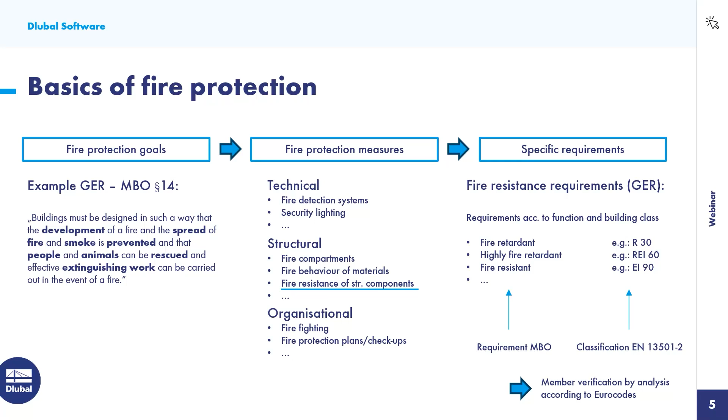So let's take a look at how fire design is regulated in the Eurocodes. I would like to start with the combinatorics.

According to Eurocode 0 or EN 1990, the case of fire is to be regarded as an exceptional design situation. Accordingly, the mechanical actions are combined without partial safety factor. The use of psi 2.1 is recommended in the main document for the leading variable action, but there are many deviations in national annexes. In Germany, for example, psi 1.1 is prescribed for leading wind actions.

It is obvious that the combination rule results in significantly lower actions when compared with the permanent and transient design situation that we commonly use for the design under normal temperature. As a safe side assumption, the loads from the code design multiplied by a reduction coefficient can also be used. However, this is generally uneconomical and therefore not recommended, especially when we use a design software that can do the correct combinations anyway, like RFEM.

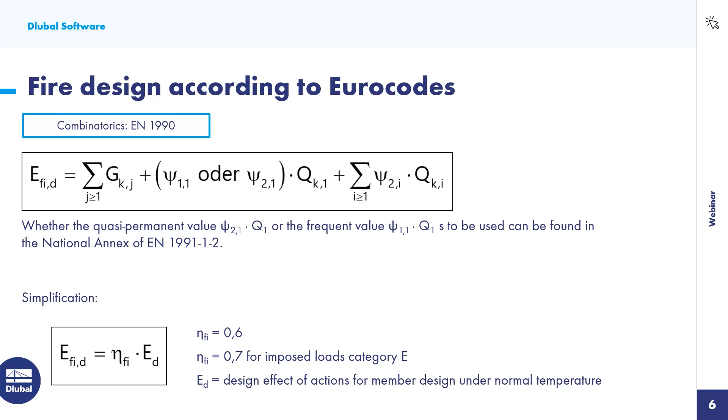In addition to the mechanical actions, the thermal action in accordance with EN 1991 Part 1.2 must also be taken into account. In the event of a fire, there's a considerable increase in the ambient temperature, and sooner or later, the structural elements exposed to the fire will heat up as well. This has a dramatic effect on the material properties of steel components on one hand. On the other hand, the temperature increase can lead to indirect stresses in case thermal expansion is restrained.

Real fire scenarios develop in 4 stages. We have the incipient stage, the growth stage, the fully developed fire phase, and the decay phase. The transition to the full fire phase is called flashover and is associated with a rapid rise in temperature.

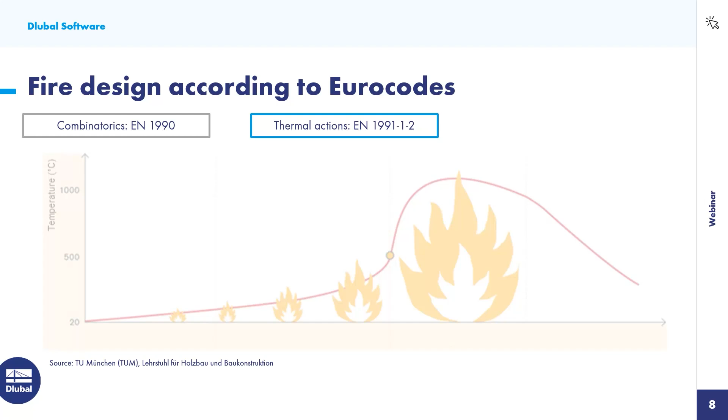For engineers, it is very challenging to accurately predict the development of a natural fire scenario. Instead of trying, so-called nominal fire curves have been established almost 100 years ago to describe the temperature developed in a compartment over the duration of the fire in a simplified manner.

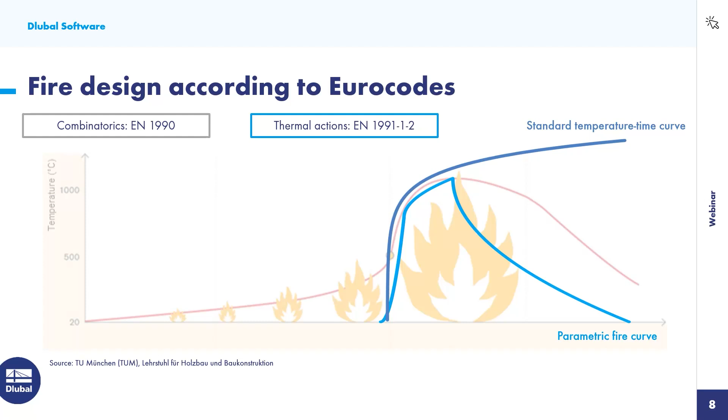The standard temperature curve is used for fires inside buildings. This temperature curve is also used for standardized fire tests on structural elements, which means that the behavior of typical elements under this nominal fire exposure is quite well documented and verified. Alternatively, the Eurocode also allows the use of more sophisticated approaches to predict the temperature development, such as parametric fire curves, zone models, or results from CFD analysis.

The actual design of structural elements is regulated in the respective material-specific Eurocode, such as the Eurocode 3 Part 1.2 for steel construction. In principle, all ECs or Eurocodes distinguish between 3 alternative methods with increasing complexity and accuracy.

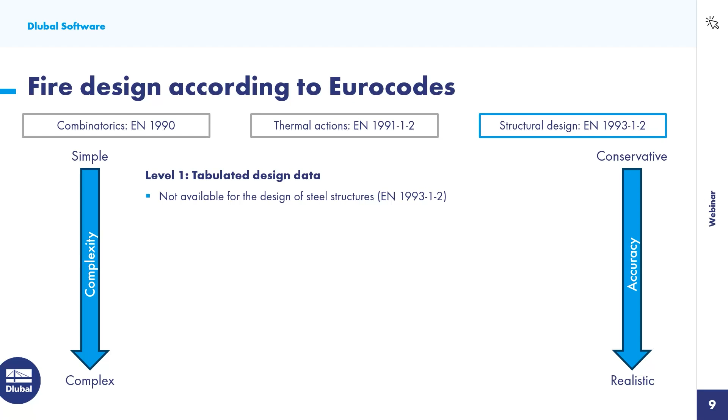The simplest design approach is design by tabulated data. This is oftentimes used for fire design of concrete elements, where it is sufficient to choose the suitable dimensions, for example, wall thickness, for a specific fire class. This approach is unfortunately not available for steel structures.

In the second level, we find the so-called simplified design methods. Here, the thermal actions are prescribed by nominal fire conditions, such as the standard temperature curve for fires inside of buildings. For such conditions, Eurocode 3 Part 1.2 gives clear rules for the design of steel members. This verification can either be done based on the resistance or based on the critical temperature.

The most accurate but also complex analyses are possible under the advanced design methods. The thermal actions are usually derived by more sophisticated methods here, such as parametric fire curves, zone models, or CFD. This enables a more economic design most of the times.

The design rules are very openly formulated. Any suitable thermal and mechanical analysis model can be employed. However, the validity of the chosen approach must be proven on a case-specific basis and requires a high level of expertise. In RFEM 6 and also RSTAB 9, the resistance-based simplified design method is implemented.

A system calculation under elevated temperatures is not required in this case. The design concept is very similar to the design under normal temperatures, but under reduced load as we combine actions in the exceptional design situation. The thermal action is only taken into account on the resistance side and induces a reduction of design-relevant material properties. I would like to explain this point more detailed in the next slides.

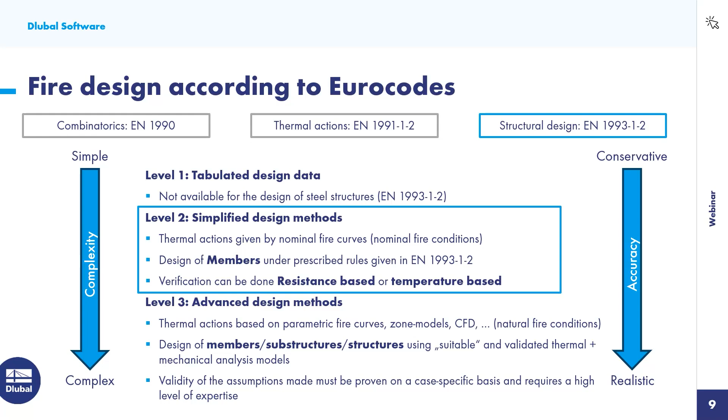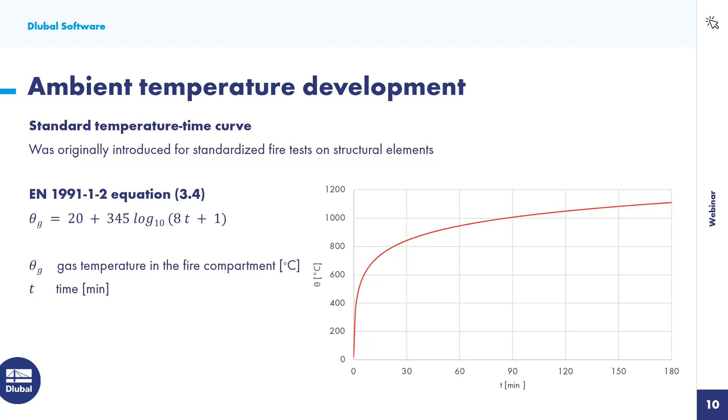As explained on the previous slide, the simplified design method is linked to the application of the standard temperature curve. This means the development of the ambient temperature during a fire is approximated in a simplified manner according to the logarithmic function shown here. The standard temperature curve idealizes the full fire phase and neglects the growth and decay phase of the fire.

So the development of the ambient temperature is specified by the standard temperature curve. However, for design purposes, we are interested in the actual temperature of the structural member. According to EN 1991, or Eurocode 1, Part 1.2, two different components must be taken into account when analyzing the transport of heat from the surrounding hot air into the heated component.

The heat flux from convection, so the exchange of heat from the hot ambient air and the cold component surface in the boundary layer, and the heat flux from radiation or thermal radiation.

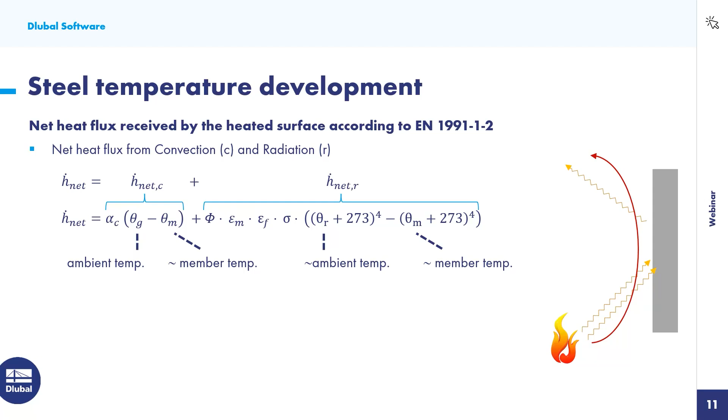Additionally, Eurocode 3 Part 1.2 contains a formula for calculating the temperature development of unprotected steel members. In addition to other parameters, this formula includes the aforementioned net heat flux. The formula assumes uniform heating of the cross-section, and the input variables shown here change with the component temperature. It can only be solved iteratively in small time steps described by delta t.

I know there's a lot to explain, but I'd like to leave the formula as it is right now. We'll come back to the various parameters in detail later, as they are important influencing variables for fire design and any fire protection measures. For now, we take note that we can describe the relationship between ambient temperature and component temperature in the event of a fire. But how does the member temperature actually affect the design?

According to Eurocode 3 Part 1.2, design-relevant material parameters such as the yield strength and stiffness must be reduced depending on the material temperature, while the yield stress only has to be reduced at temperatures above 400 degrees Celsius, but then quite rapidly, as you can see here.

The stiffness already decreases at significantly lower component temperatures. At around 600 degrees Celsius, the reduction of the yield stress already accounts for roughly 50%. At 800 degrees Celsius, it is almost 90%, so there's only very limited resistance left. These reduction factors are then considered in the member design equations under fire conditions, which are otherwise very similar to the verifications we use for design at room temperature according to Eurocode 3 Part 1.1.

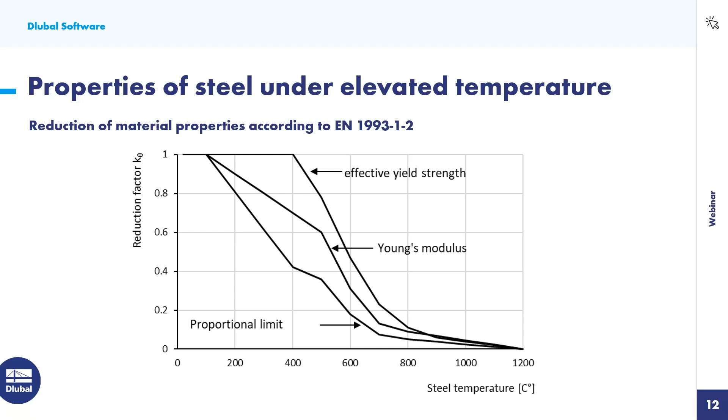Okay, so I have already prepared this simple model beforehand. It's just a simple beam with an intermediate support in lateral direction in the middle. It's an HEA 300 section, 10 meters long. I think the steel is S235. Yes. This member is already loaded by 3 load cases, so self-weight of the beam itself.

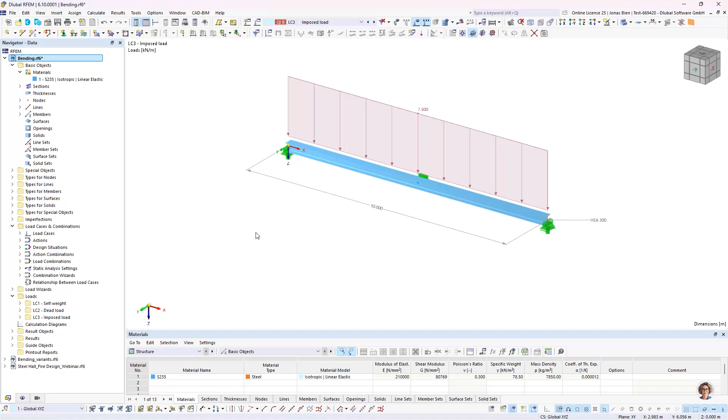Then we have dead load, an additional 5 kilonewton per meter, and load case 3 is imposed load category B with 7.5 kilonewton per meter. I've also defined one design situation for the code design of this member, so the usual combination of permanent and transient, as you can see here, and this results then in automatically generated load combinations.

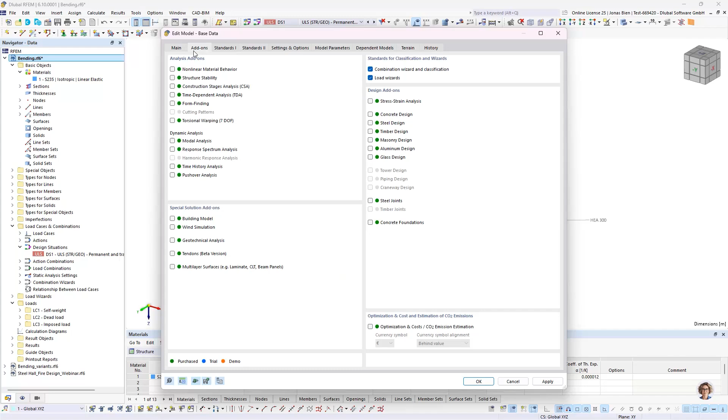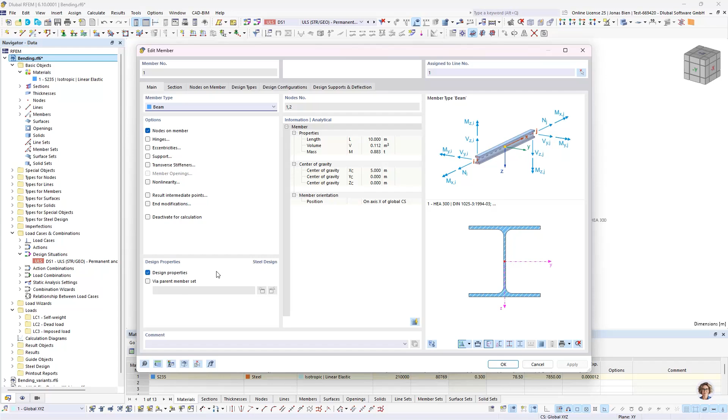I want to start with the code design. So I switch on the steel design add-on, go to standards, and for now I will just use the main documents of the Eurocodes and use the common rules. As we are used to, the design add-on has already recognized that we have this member that can be designed with our steel design add-on. So that's fine. And besides the section checks, I also want to do the check for lateral torsional buckling according to the equivalent member method.

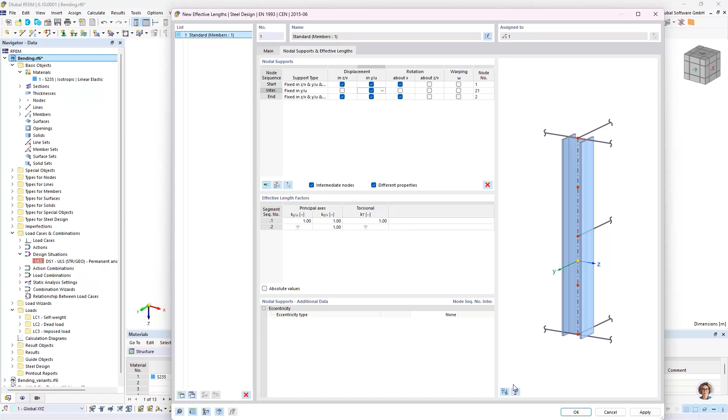So I will also define an effective length, and I want to leverage the intermediate node. So I will just enter or assign a lateral support here at the middle, as we have modeled it in the global model as well.

Okay, so let's do this. And by the way, this assignment of the buckling length is valid for the code design and also for the later fire design that we are doing.

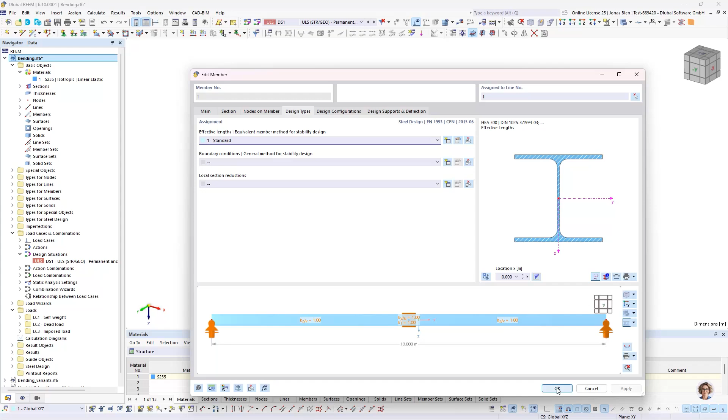Okay, but for now, let's start with the code design, the usual thing that we know. I will just run the simulation now, this very simple case, and we will check the utilizations that we get under normal temperature. Okay, so as we are used to, we get section checks for shear and bending. There's also, I think, shear buckling. And since we also activated the buckling length, we also get the stability check for lateral torsional buckling. We can see that the maximum utilization is around 83%. So this is completely fine.

Everything's good so far. So now let's see how this changes when we investigate the fire scenario. Let us do all the adjustments that we need in order to activate this. First of all, we need a design situation that is appropriate for our fire case. So I will add a second design situation for the accidental load case, using psi 2,1 as it is prescribed in the main documents of the Eurocode.

We can again check the combination rule, and this is totally fine for us and looks like the rule that I showed you before in the slides. Okay, so I get two additional load combinations now for the fire situation.

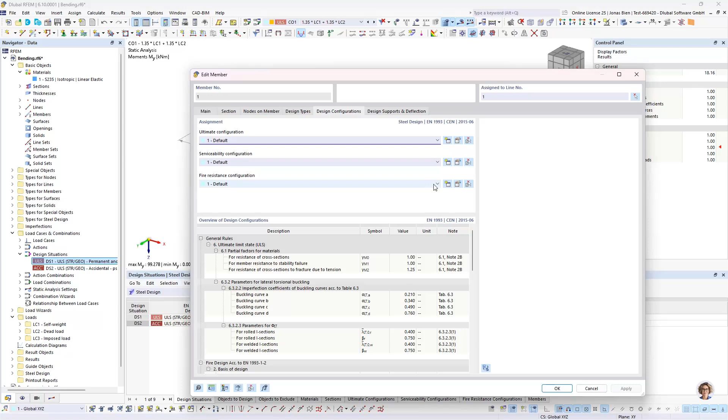In here we have to first define what the resistance class of my member is going to be, so at what time I want to perform my fire design checks. In this case, I assume my member needs to survive for 30 minutes, so it has an R30 requirement. I will set 30 minutes as the required time for the fire resistance.

We can also see here under the temperature curve for determination that by default the standard temperature time curve is set, and this is the one we want to use for internal fires and the member design method. We could also give a manual temperature for the program to use for the fire design checks, but we want the steel temperature defined by the standard temperature time curve.

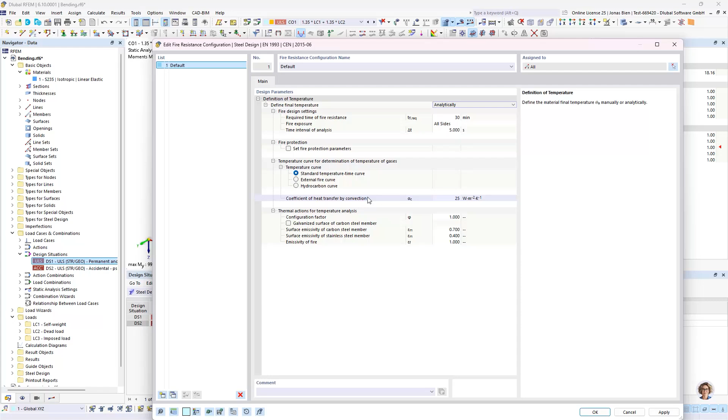And we want to do the check after 30 minutes. The remaining parameters I will not touch yet; we will come back to this later. So I will just assign this by clicking OK, and then run the steel design again.

So we have to solve now the two additional load combinations, and then the steel design runs again. First of all, I want to compare the forces that we now have to take for the design.

So if we check the maximum bending moments for design situation 1, the cold design case, we have a maximum bending moment of almost 240 kilonewton meters, while in the second design situation under accidental combination, we get more or less 100 kilonewton meters. So the load we need to take into consideration in the hot design is much smaller than in the cold design.

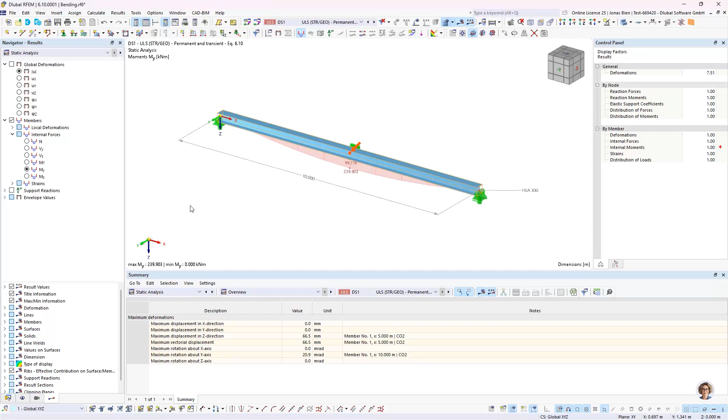However, as we could already see, we now have a big problem with our design verification checks. The maximum utilization is over 300%, so that's not good at all. Let's check why that is, and how it comes that the utilization is so much higher than in the cold design stage. Let's actually compare some design checks.

We could start with the bending check about the strong axis. We will start with the cold design, which we are very used to. So we have the 240 kilonewton meter design bending moment. We do the section classification and see we have a class 1 section, meaning we can use the plastic design resistance to calculate our utilization. In this case we have a utilization under 80%.

But how does this change in the fire design situation? Let's check the respective check under increased temperature. We see we have a smaller design bending moment as already shown before, and now we also have a different section class. That is interesting, and we can also check what is the reason for this.

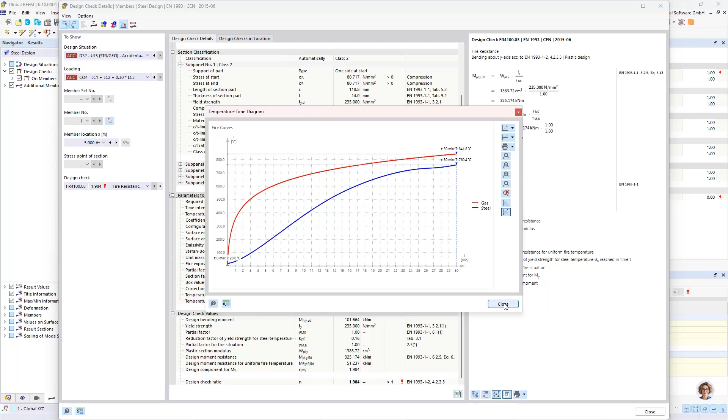There are also some other parameters here given for fire resistance. Up here we find all the settings assigned to this member by the fire design configuration, and then some additional parameters that I will focus on later. For now, we can see that for the cross-section checks, we have a drastic reduction of the resistance due to the increased temperature, which is very high in this case.

Maybe we can also check the stability design check, because that reveals some details too. First, we calculate the critical bending moment the same way as we do for the cold design. I think this 757 should be the same for the cold case as well.

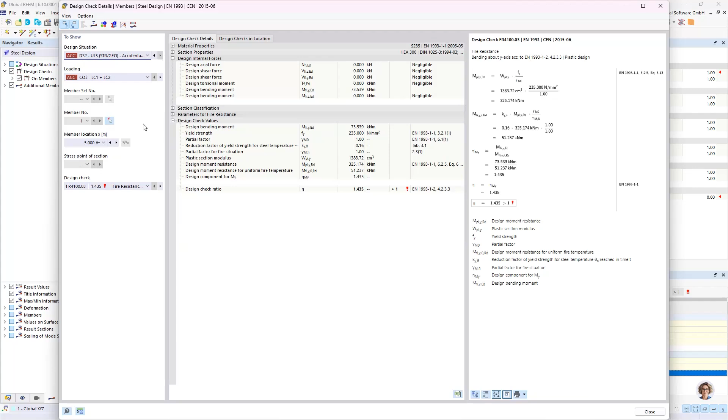When we check the stability design check, yes, it is one-to-one. But then in the fire situation, we have to again reduce it by taking into account a modified dimensionless slenderness. This slenderness is not only modified by the reduction factor for the yield stress, but also depends on the reduction factor of the stiffness, because stability design checks are very much dependent on the stiffness of the system. So any degradation on that side will also alter our verification check for instability.

Another important point is the derivation of our imperfection factor. While in the cold case this depends on the cross-section buckling curve, here it only depends on the material of the section. So there are slight adjustments, but otherwise the schema for the verification checks is very similar to the cold design case.

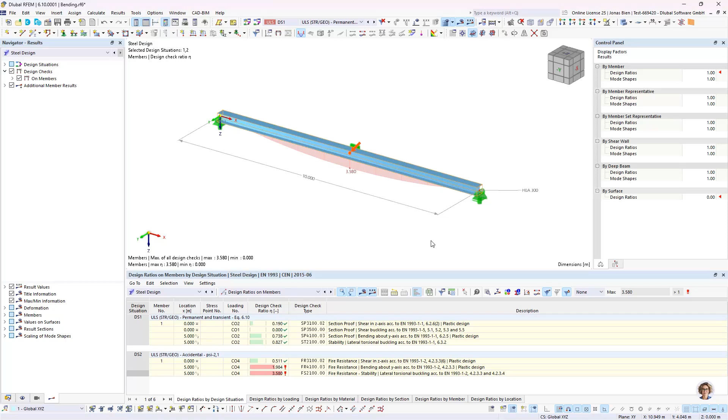I think we can agree that our first attempt to verify the fire resistance of this beam was not very successful. So what can we do to increase the fire resistance of our beam? Of course, we could lower the loads or increase the section size, but we've seen that the member heats up very quickly, leaving only minimal strength and stiffness after 30 minutes.

To discuss possible measures to delay the heating process, let's come back to the formulas describing heat transfer from the ambient temperature into the structural element. We've seen these before, and if we combine the two formulas, we get this quite long expression. Most of the parameters represent physical constants that we as structural engineers cannot influence much: the specific heat of steel, the density of steel, the coefficient of heat transfer, the configuration factor, the emissivity of fire, and the Stefan-Boltzmann constant. Those we shouldn't touch at all.

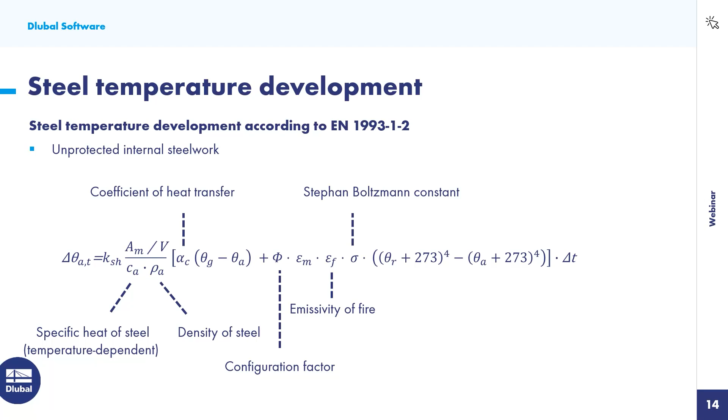However, let's take a closer look at the expression A_m over V. This ratio, also known as the profile factor, describes the ratio of the cross-section surface area to the volume per unit length, or in other words, the profile circumference to the profile area of the section. So the profile circumference for the HEA 300 here would be the dashed red line, and the cross-section area, or profile area, would be the yellow section.

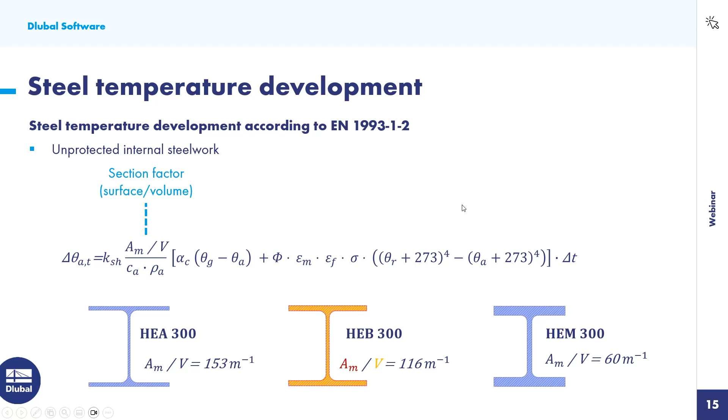If we compare the three cross-sections shown here - the HEA, a bit more slender than the HEB, and then the more compact HEM 300 - we can see that the circumference of the profile hardly changes as the cross-section parts become thicker, while the cross-section area increases significantly. This means more compact cross-sections have a lower profile factor, as demonstrated in this example calculation. As a consequence, since the profile factor is in the numerator of this heating equation, compact sections heat up more slowly. We will check this in a minute in the model again.

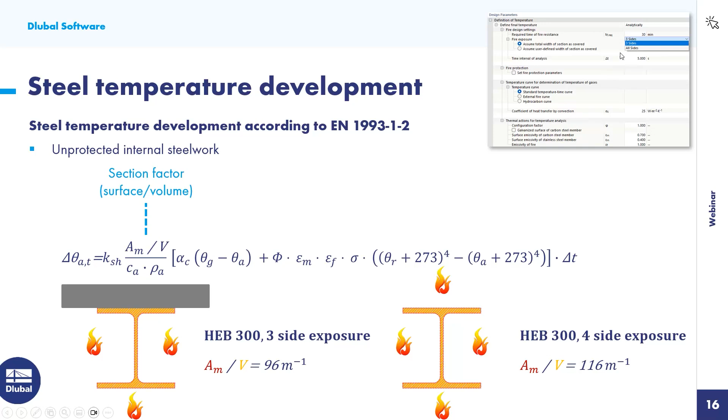Such a situation can also be considered in our program through the fire configuration settings. I will also show this later.

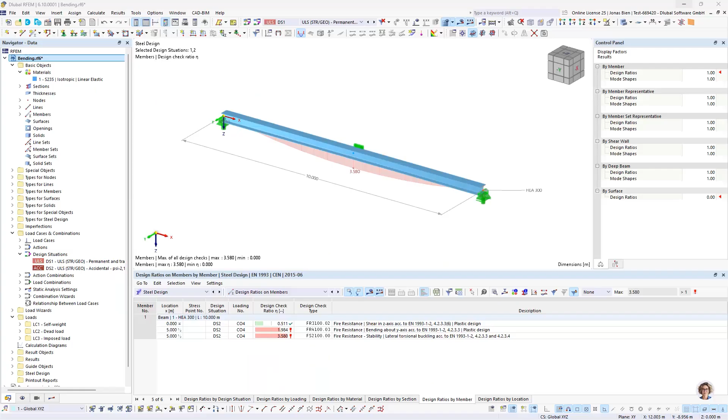Let's check if we can observe the described behavior also in our program by taking the appropriate settings. So let us switch to RFEM again. I have prepared a second model where I copied my simple beam HEA 300 that we discussed before and changed the section into an HEB 300 and HEM, as I've also shown you as an example on the slides. I applied the same loads and conducted the fire design checks here.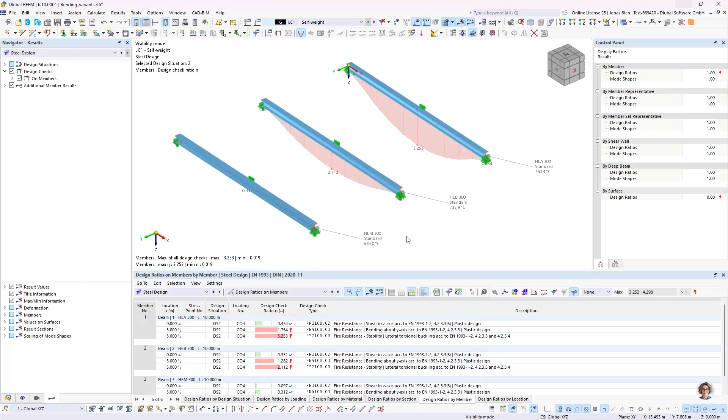It's of course no miracle that the utilization factor for the bigger profile, HEM 300, is lower. This is expected when we choose a more capable section. HEM has a higher bending resistance and also much lower slenderness, which comes into play when we look into the lateral torsional buckling design check.

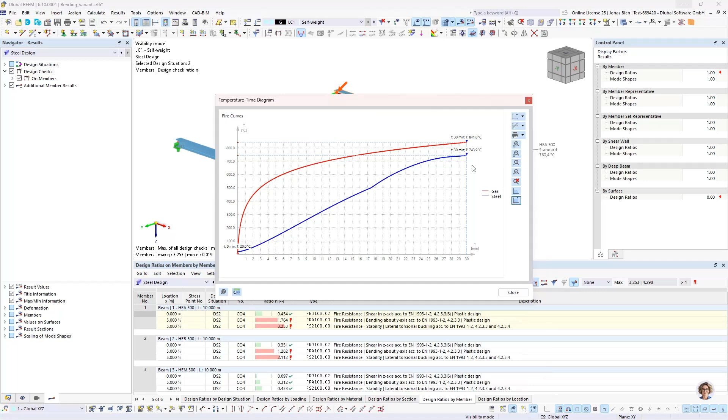But we don't want to focus on that, but on the member temperature and how it develops during the fire event. We have already checked the temperature development for our HEA 300, and we've seen that at the end, at 30 minutes, we have 743.9 degrees Celsius.

The HEB 300 is only a bit colder, 735.9 degrees. But when comparing this to the HEM, we see that by taking this much more compact section, we get a lot less heating after 30 minutes. The HEM only has a temperature of 628 degrees Celsius after 30 minutes, although unprotected.

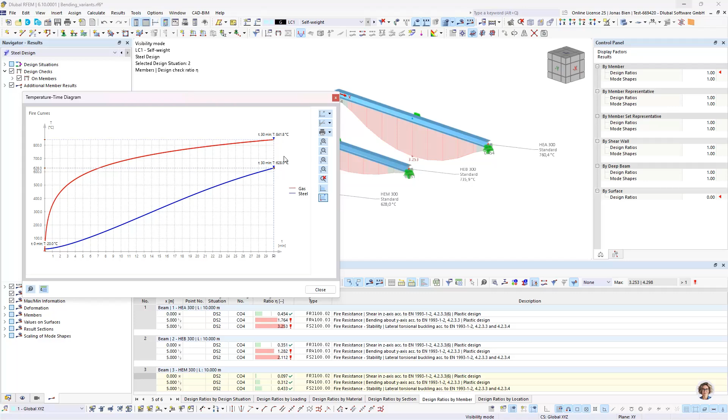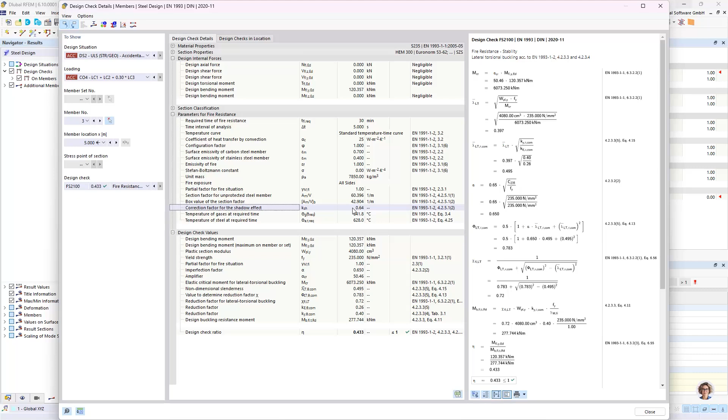We said this is because of the profile factor, and we can check this profile or section factor here in the design details for all these members. We can see that as we move on to member number 3, which is the HEM, we have a very low section factor, resulting in lower temperatures. We also see the correction factor for the shadow effect that we talked about, also given in the design details.

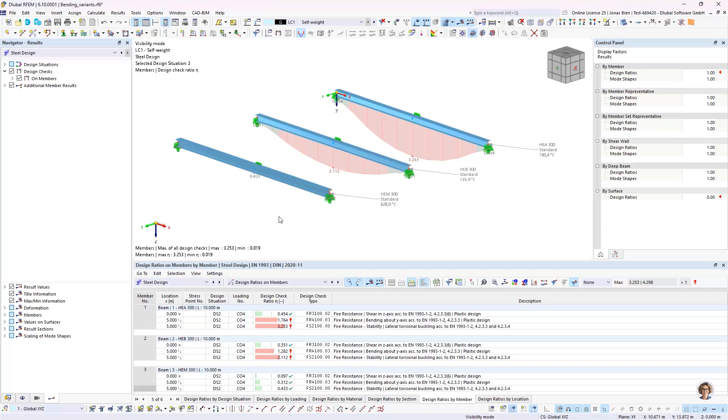We also talked about a second option to reduce or manipulate the profile or section factor, and this would be by adding or avoiding all-side exposure to the flames, for example, by a concrete slab. I have also added another example where I modeled an HEB 300 and modified the fire resistance configuration so that I only apply a 3-sided fire exposure.

As a result, we can see that compared to the standard fire case with 4-side exposure, it heats up around 30 degrees Celsius less after 30 minutes, which isn't a huge deal, but it's something.

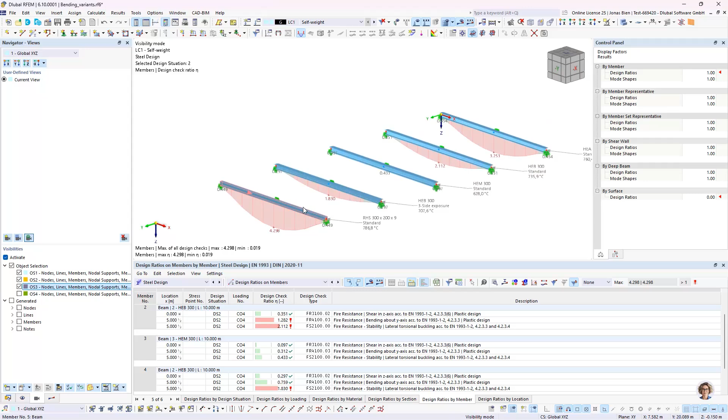Last but not least, I wanted to show the influence of this correction factor for the shadowing effect. So I also incorporated a hollow section here, an RHS profile, which has a similar section factor as the HEB 300, but it doesn't profit from the shadowing effect.

Let's go to the design details, where we can also check the k_sh factor, and in this case this factor would be 1.0. So we couldn't leverage any of this here, and accordingly it would heat up a bit more.

Okay, that's about the section choice and how the section choice modifies or impedes the heating process of the member during a fire event. But there's actually another factor that we can manipulate and alter to adjust the heating process.

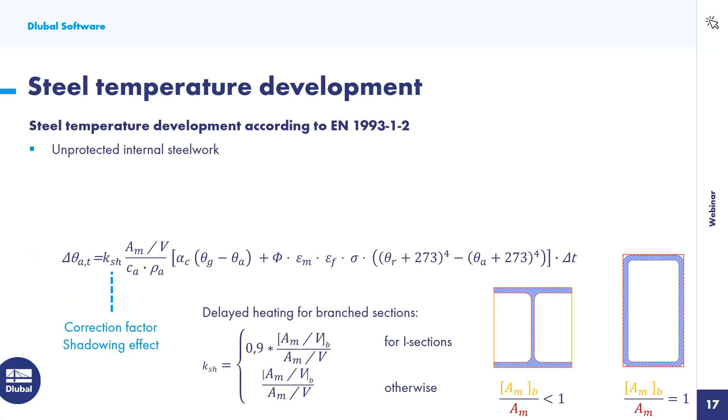So let's go back to the PowerPoint, to the next slide.

I would now like to discuss this factor here, epsilon m, which describes the surface emissivity of the member, not of the flame, but of the member. This factor describes how large the proportion of absorbed radiation energy is. An ideal black body has an emissivity of 1 and absorbs all incoming radiation in theory. An ideal white body has an emissivity of 0 and reflects all radiation. Real surfaces have values between 0 and 1.

Although this sounds highly theoretical, we are all very familiar with the relationship between surface emissivity and temperature development from real-life experience. Imagine on a sunny summer day, it is much nicer to wear a light-colored shirt than a dark one, as it reflects a greater proportion of solar radiation and does not heat up as much. That sounds good, but you might ask, what does that have to do with our steel member?

Here we actually have the possibility to change the surface properties by galvanizing it. As part of a research project at the Technical University of Munich, it was discovered that galvanized steel has a significantly lower emissivity than non-galvanized steel.

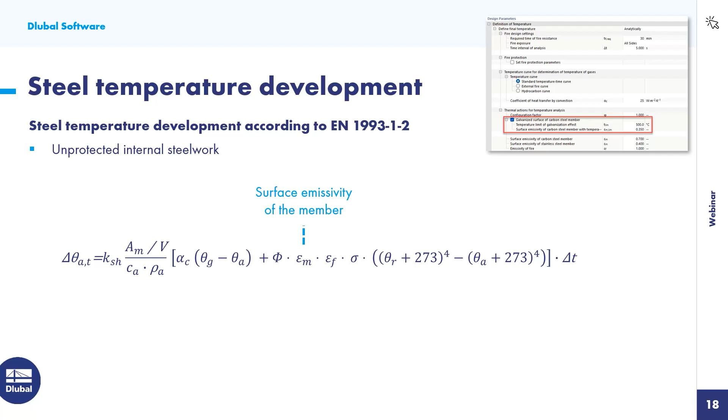We can leverage this effect at least up to a member temperature of 500 degrees Celsius, and only for shiny zinc coatings that we get from hot dipped galvanizing category A and B steels.

If I am correctly informed, this additional regulation has already been included in the draft of the second generation Eurocode. In Germany, this option has already made it into the majority of state building regulations via an additional guideline published by the Institute for Hot Dipped Galvanization, named the DASt Guideline 027.

So we can also take this galvanization into account in our program. I can show it to you - I think it's simpler if I show it to you just in the program. So let's jump back.

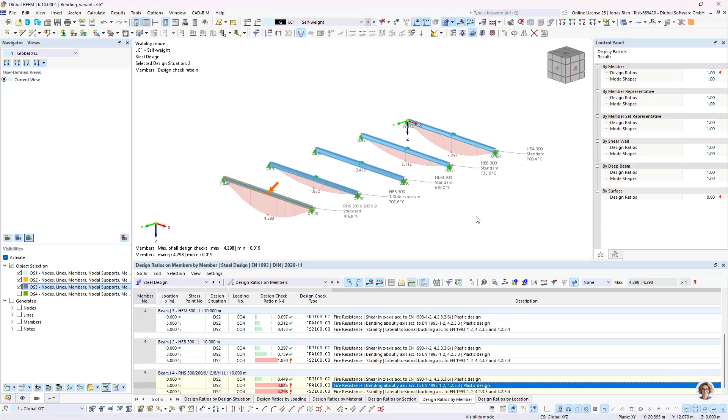Now I want to modify the selection of the members that I have modeled up front. I again have copied all of those members that I've shown you before, different sections, and also the HEB with the three-sided exposure, and modified the fire design configuration in such a way that I also...

...changed the emissivity by galvanizing the surface of the carbon steel. I can do that by just activating this option here, and then it actually also takes into account this limiting temperature of 500 degrees Celsius, and until then uses a lower surface emissivity.

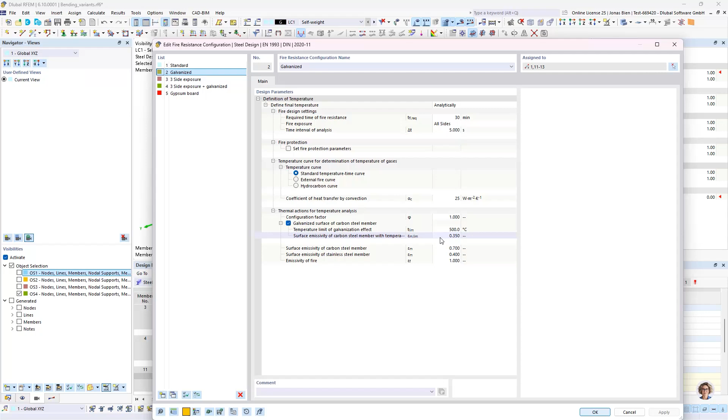Okay, so let's see how this again affects the heating up of the member. We can see for HEA it does not have such a huge effect. Same goes for the HEB300.

Let's actually look into one of those diagrams, because it reveals the fact that the emissivity changes at a temperature of 500 degrees. As we can see here, there's a significant dent in this curve, and this is at a temperature of 500 degrees Celsius and marks the point where the emissivity jumps from 0.35 to 0.7.

For the HEM profile, the influence of the galvanization is very, very huge. Instead of a temperature of 628 degrees Celsius, we get a temperature that is almost 150 degrees lower after 30 minutes. That's mostly because for the whole 30 minutes we are below a member temperature of 500 degrees Celsius, which means that until the end we can leverage the lower emissivity of the member surface. Then, of course, the benefit is much greater, because it's more or less the integral of the heating over the time.

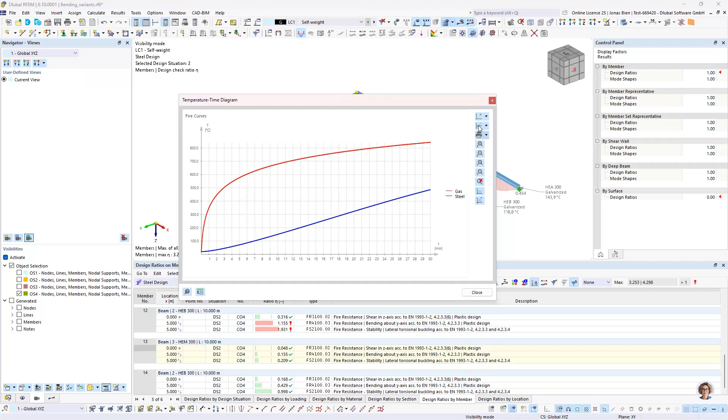It is also interesting that, for example, when we consider an HEB300 and maybe anyway have one side of the section covered by, for example, a concrete wall, and we then take into account additionally the galvanization that we might anyway have because of corrosive protection measures, we see that we can reduce the member temperature from 736 degrees to 633, and under this temperature we are even able to fulfill the verification checks - instead of a maximum utilization of 200 something percent, we go under 100. So without any additional measures in this case, we could already fulfill our fire verification checks.

All right, last but not least, let us talk about conventional fire protection systems. Therefore, I would like to switch back to the PowerPoint presentation.

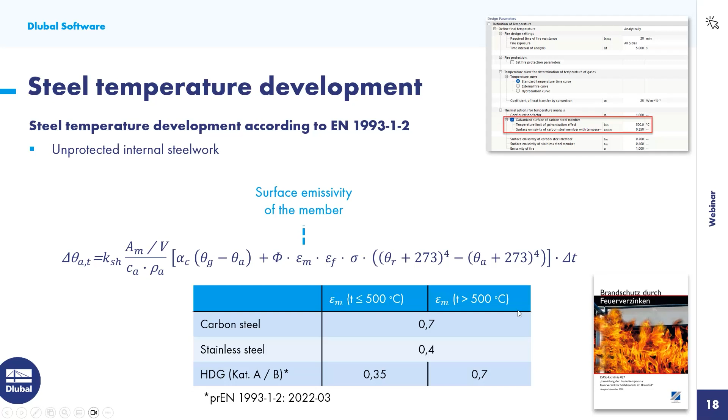As said earlier, the possibility to improve the fire resistance by galvanization is very interesting, as many steel structures are galvanized anyway for corrosion protection. In this case, the improved fire protection is a nice bonus.

But conventional fire protection systems exist as well. They have a much higher protective value, and they can be taken into account in our program. We can consider spray, plaster, or board encasement, using an alternative formula provided by Eurocode 3 part 1.2 for the temperature development in internal steelwork insulated by fire protection material. In addition to parameters we've already introduced, the properties of the fire protection system are also taken into account.

So we have the thermal conductivity of the fire protection system, the thickness of the fire protection system, and the specific heat and density of the fire protection system.

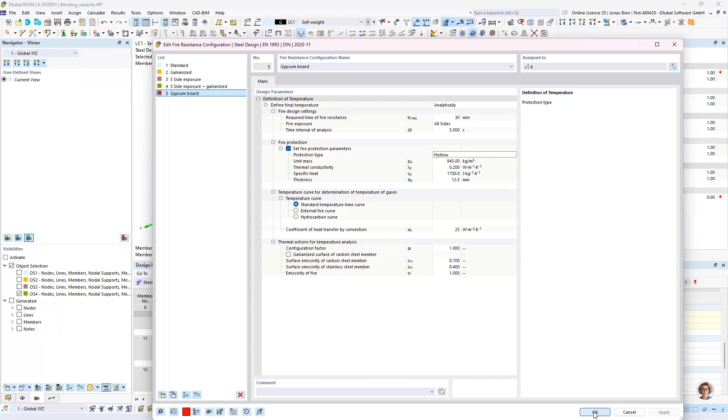And what I can see is that this has a dramatic effect on the temperature. In this case, by the encasement, I get a very low temperature after 30 minutes, below 300 degrees Celsius. So higher fire resistance classes of R60 or R90 can also easily be realized with such sophisticated fire protection systems.

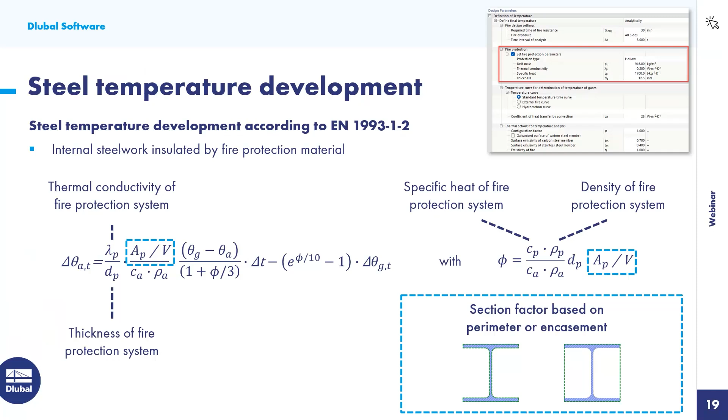Okay, we have now dealt extensively with the fire design assessment of a single member and checked how we can influence the temperature development in that member in the event of a fire. I would now like to move on to more advanced topics and questions.

I've summarized the relevant paragraphs of the Eurocode on the next slide. So let's check this out together.

In Eurocode 1, part 1.2, section 4.2.1, it is written that indirect actions from adjacent members should not be considered when fire safety requirements refer to members under standard fire conditions. And then there is also the clause in...

Eurocode 3, part 1.2, section 2.4.2, that the effects of thermal deformations resulting from thermal gradients across the cross-section shall be considered. The effects of axial or in-plane thermal expansion may be neglected, though. And because the formulas we use to determine the heating of our section always assume constant heating over the section, we don't need to take into account the thermal deformations at all.

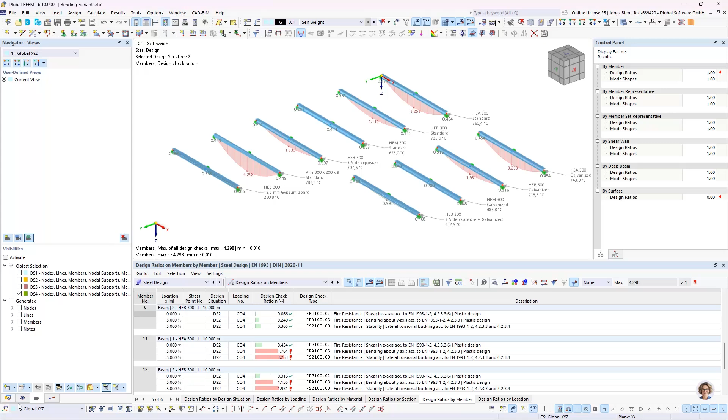Okay, let's go back to the program and go into the third model I have prepared, which is basically the steel hall that you have seen on the slide before.

In order to take the indirect actions, or to calculate these indirect actions, we first need a temperature that we want to apply to the model. This temperature we could either derive by the standard temperature curve, or by some other specification, a parametric fire curve, CFD analysis, whatever it is coming from. We need to make some assumption about to what degree our structure heats up, and then we can apply this temperature load via, for example, a member load.

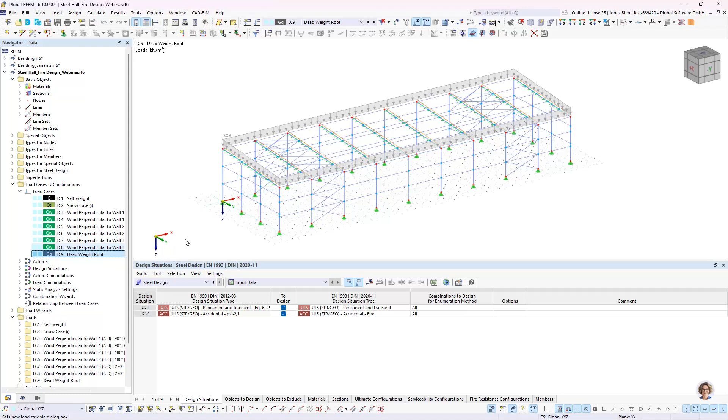So I want to go ahead and create a new load case for this temperature load. In this load case, I think it's sufficient to do it here. We want to analyze the effect of the thermal expansion. So I create a load case 10 and let's name it temperature.

In this load case, I want to apply, let's say we aim for a 30-minute fire under a standard temperature curve that would give us an ambient temperature of around 800 degrees Celsius. I have many sections here that would all heat up differently, but I will now, to be on the safe side and for demonstration purposes, apply a uniform temperature change to all members of 800 degrees. So that's just some assumption.

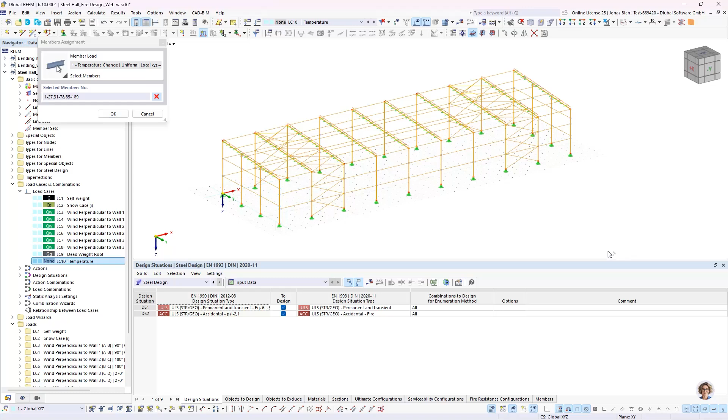Okay, so I select all members and apply a constant temperature over the section, a temperature increase. And now I could just run this analysis here, calculate the resulting reactions under this temperature increase.

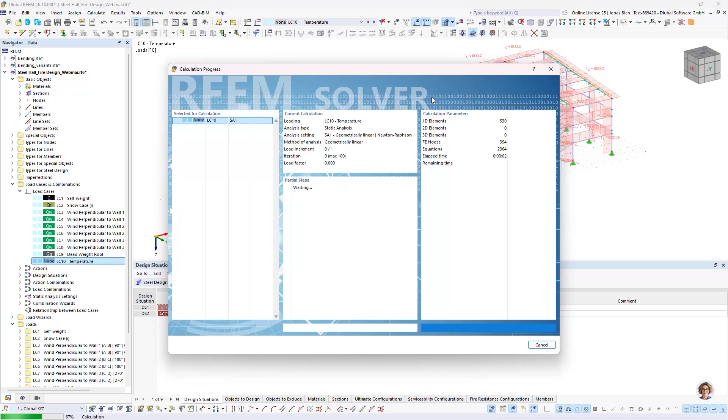And I would be actually shocked, because as you can see here, we get very large restraining forces. So as I already mentioned, the steel wants to expand, and we have in this steel hall bracings in some of these bays, and the compression members between those braced bays cannot expand very much. So the thermal deformation actually goes into axial force, and we get a very huge compressive action in these members. But now we have to consider one thing.

Eurocode 3 part 1.2 says that we have to also modify our mechanical properties of the steel at elevated temperatures, and we can take this effect into consideration as well. Because when we remember the diagrams we looked at regarding the properties under elevated temperatures, we may recall that we do not only decrease the strength of the material with increasing temperature, but also the stiffness. And the lower the stiffness, the lower these restraining indirect actions will actually be.

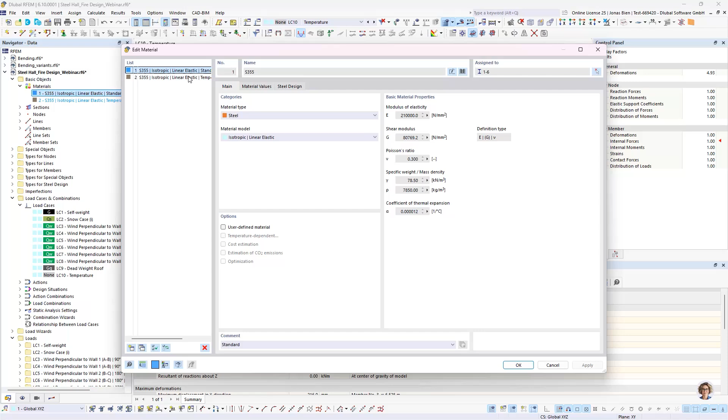So I have already prepared two materials. The first one that we just used for the first calculation step was just a regular mild steel, S355. The second one is a copy of that, but here I activated the user-defined material option and the temperature-dependent option. By doing so, I am then allowed to enter a temperature-dependent modulus of elasticity, for example, and this curve is now just copied from Eurocode, basically. All these points are given in the Eurocode document, and we can leverage this to enter our temperature-dependent material properties.

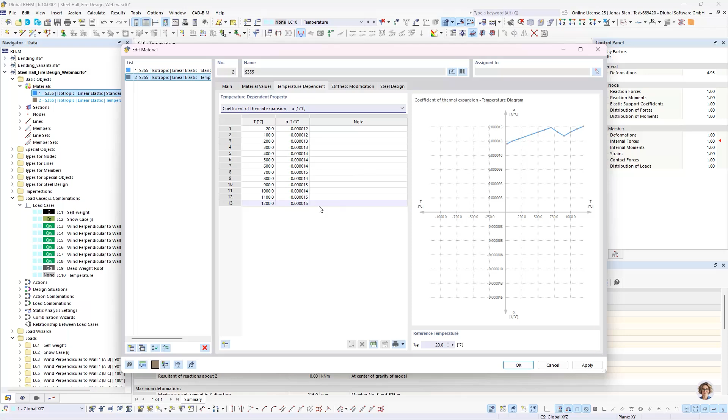Also, I think the coefficient of thermal expansion is dependent on the temperature, and I can take this into account as well here. Now let's see what happens if we actually take this temperature-dependent material into account, and how this affects the results, the indirect actions that are generated under elevated temperatures.

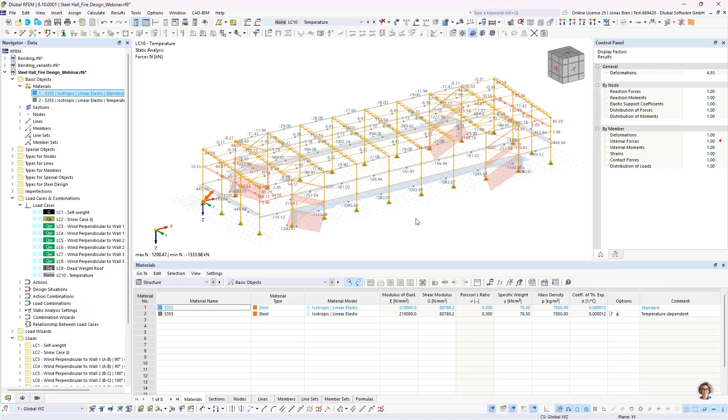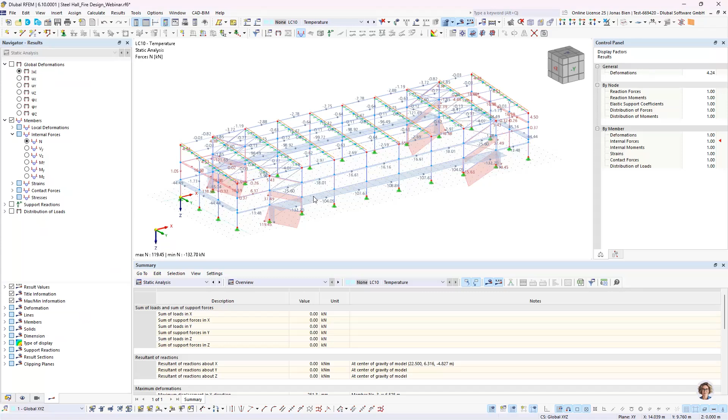So we remember we had in the first attempt compression forces of over 1 meganewton. Now we go into the simulation again with the temperature-dependent material, and let's wait a bit, but we should see that those compressive forces are very largely reduced. Yeah, we can see that it is almost reduced by a factor of 10. So now the compressive force that's left over at the temperature of over 800 degrees in the member is around 100 kilonewton compressive force.

So whenever we want to take these effects into account, we always have to remember that we not only have these restraints that add some actions into our model, but we also at the same time have the degradation of the material properties, which in this case helps to lower these restraining forces in the model. Okay, so that's it for that question. Let's move on to the next one.

How can we modify buckling length and boundary conditions for the fire design situation?

Eurocode 3 Part 1.2 allows for reduction of buckling length in some specific cases. Such design situation dependent modifications of the buckling length can be taken into account with our construction stages add-on, and I want to quickly show you the necessary steps to set this up.

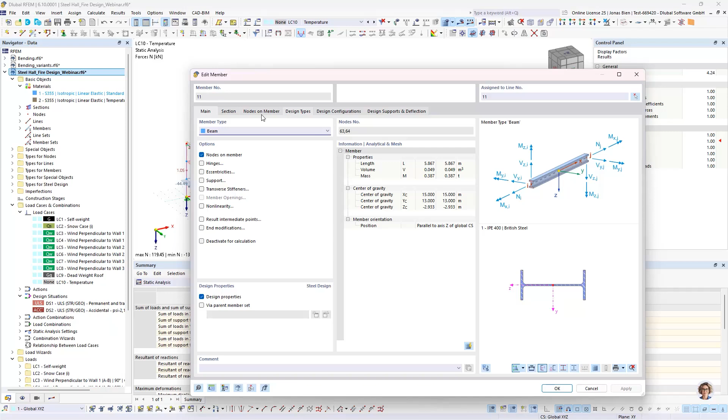So in this model, I think there are some buckling lengths applied for these columns, for example, and we want to change them for the design, for the fire design case.

So I activated the construction stages add-on, and I create a new construction stage where I want to activate basically all my objects that are relevant for my analysis. So all the members and nodal supports. I don't have any line supports or surface contacts or rigid links.

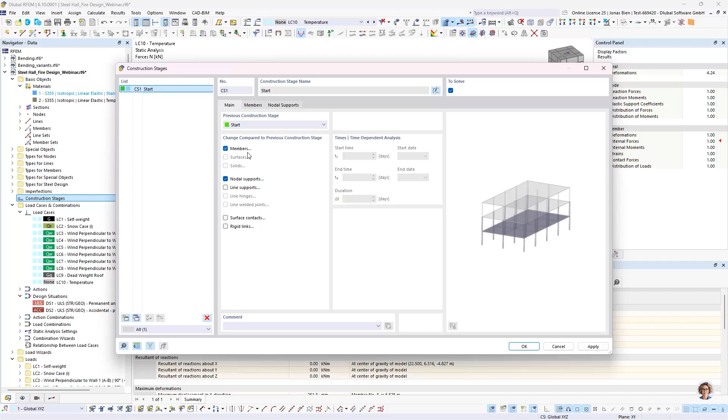And then under the member tab, I can not only activate or deactivate members here, but I can also modify them. And for example, I could now say, okay, for this column, I want to define some steel design configuration, for example, the effective length settings. And I could now override my original assignment of buckling length with a new one.

Let's just take for demonstration purposes the type 2 I have already defined. But it could be every effective length type that I have maybe modified from the original version.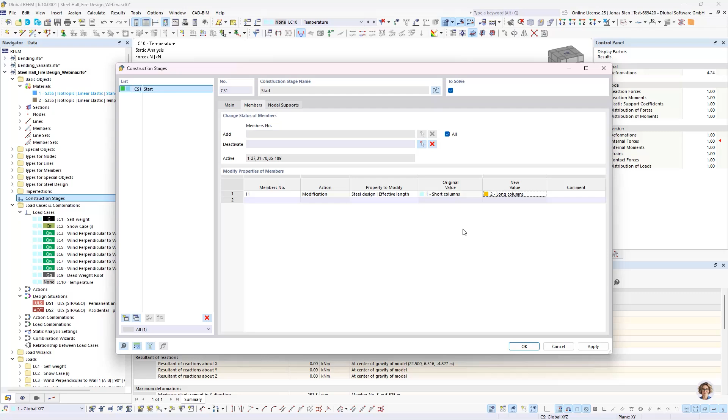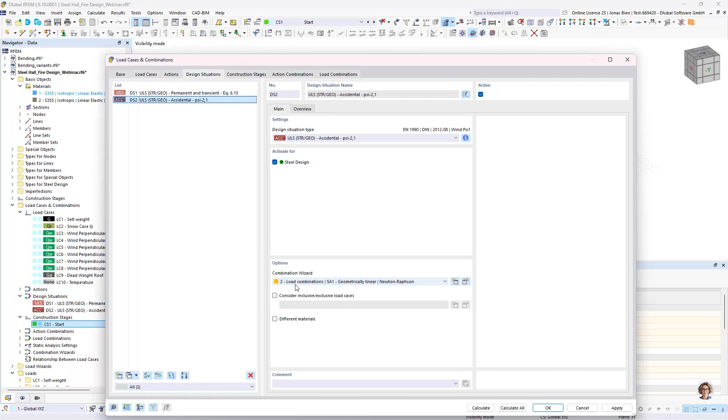Okay, I apply this with OK, and the thing I then need to do to assign this construction stage to my design situation 2 is apply all the load cases to this construction stage. The easiest way to assign the construction stage to all load cases generated in design situation 2 is if I modify the combination wizard. So let's just copy the first one.

And now in this case, we want to consider an initial state. And this initial state is defined as our construction stage 1. I apply this with OK.

And now let's see how those load cases look like. I can see that for all the generated load cases, construction stage 1 is now considered as being active. And that also means that the buckling length modification would be active.

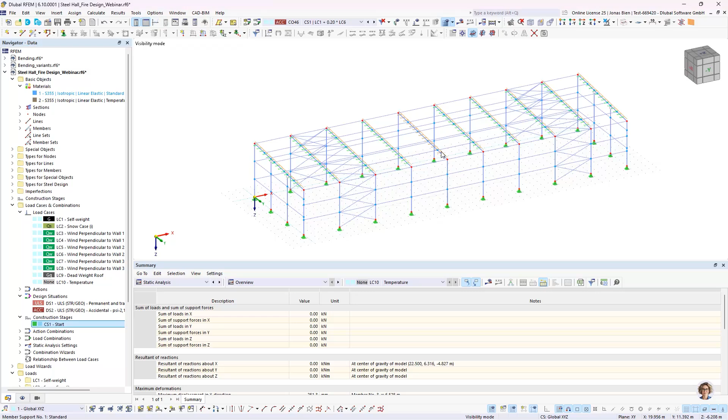A second scenario would be that you may want to change a boundary condition for the stability checks, for example. In this case, when I want to leverage the rotational restraint of these girders in the cold design case, I may wonder, if it comes from a trapezoidal sheeting, if I can, or if I should take this beneficial effect of the trapezoidal sheeting also into account in the fire design scenario.

Because if I imagine that there's a fire in this steel hall, these trapezoidal sheetings heat up very fast because they are very, very thin, just 1 or 2 millimeters. And as we learned, the material properties degrade very fast, and I wouldn't have a lot of stiffness that helps me in my lateral torsional buckling design check in the fire design situation.

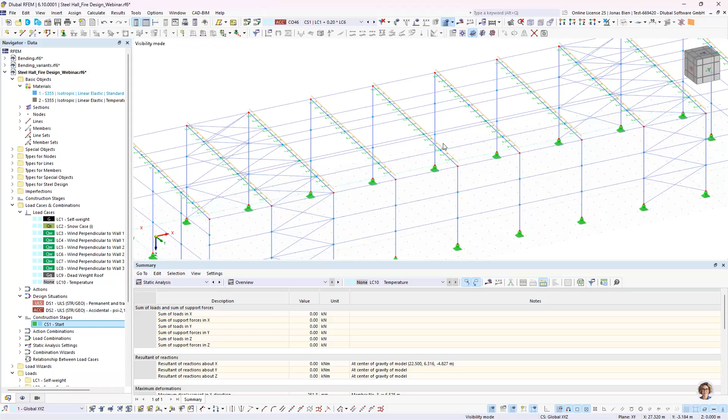So if I want to be on the conservative side and don't want to use this beneficial factor in the fire design situation, I could also deactivate these member supports in that case. And that can be done via structure modification.

I could assign the structure modification also to the combination wizard. That would be the most elegant way to have it active in all the load combinations that are then automatically generated. So I again open the combination wizard and now also in addition activate the structure modification.

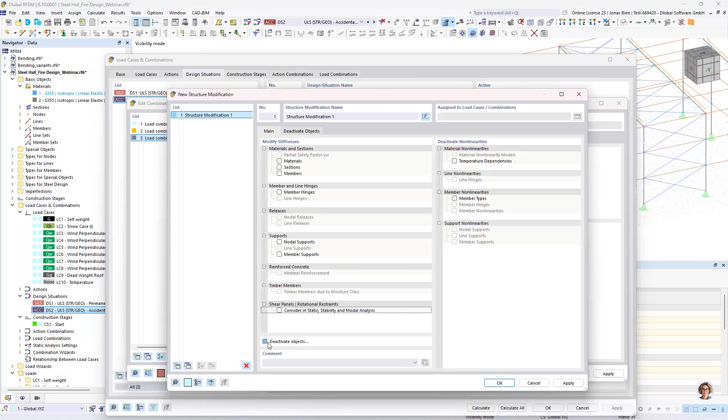And in that structure modification, I want to deactivate specific objects. In that case, I want to deactivate the member support, and to tell the program which member supports I want to neglect, I need to create this object selection. Here I can, for example, select the member supports by their number.

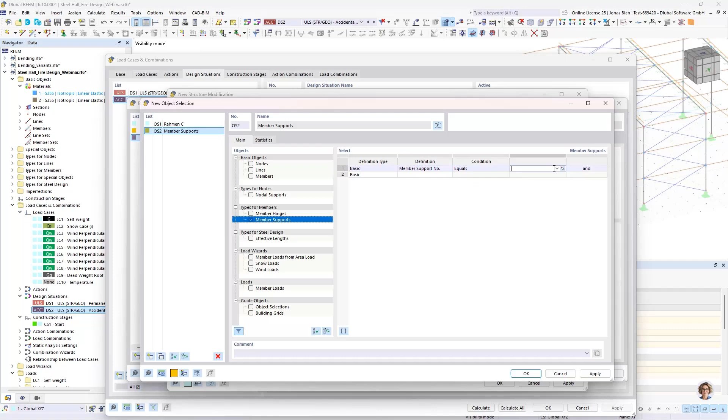And I can also select the member supports I want to deactivate graphically. I need to make them visible first. Here we go. And in this case, I would also take into account the structure modification.

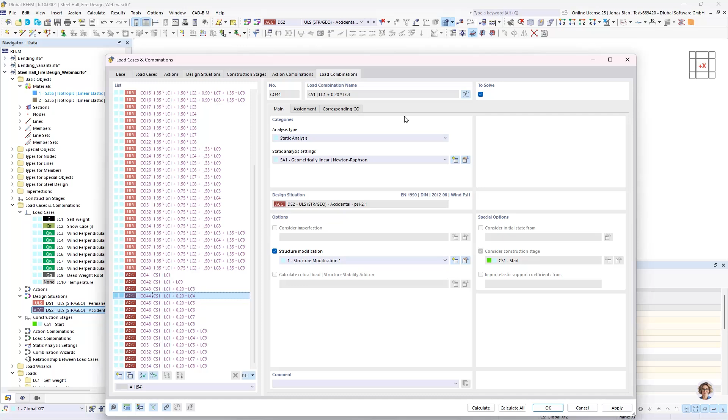And again, all the generated load cases and load combinations would have not only this construction stage where I modified the buckling length, but also the structure modification where I deactivated those rotational restraints for the stability design of those girders.

So I could do all of this.

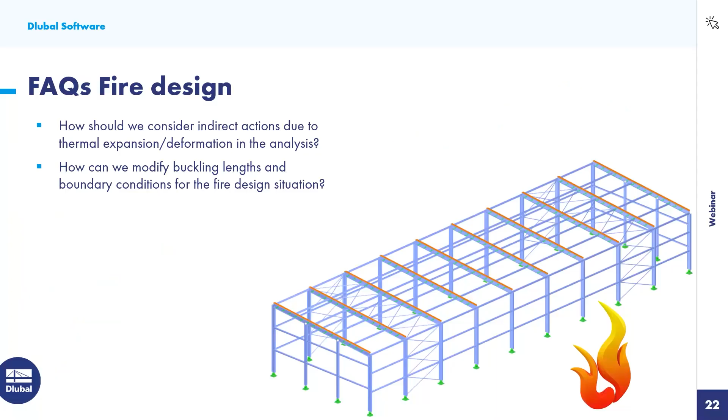I am actually not sure in which cases I would do so, because the Eurocode also has a paragraph on how to define or take the boundary conditions into account in the fire design situation. It actually says that the kinematic boundary conditions at supports and ends of members applicable at room temperature may be assumed to remain unchanged throughout the fire exposure. So if you want to change something to be on the conservative side, you know how to do that. It's a bit of engineering judgment if you want to modify those in the event of a fire.

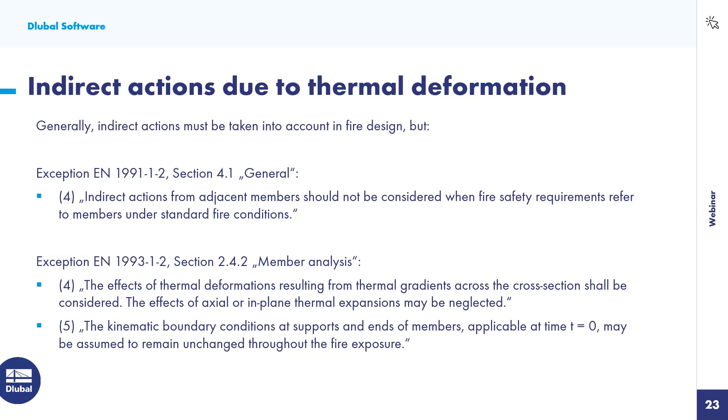The third question considers the verification of steel joints. When thinking about a complete steel structure, we should not forget that we also have to verify the joints besides the members. In RFEM 6, we have a dedicated add-on called Steel Joints for the verification of joints, but unfortunately the design under fire conditions is not considered therein, at least not yet.

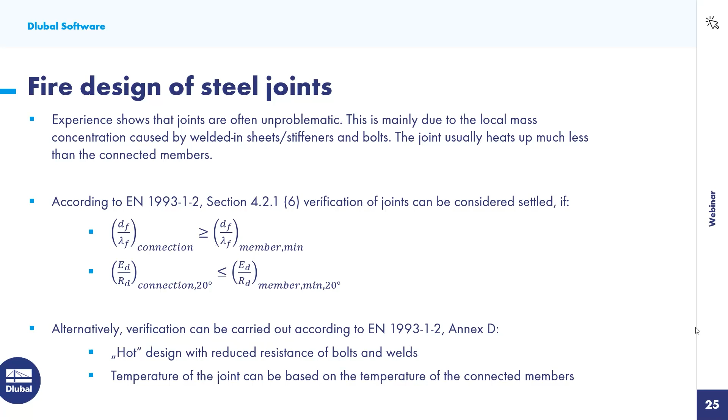The last question I want to tackle is how can I calculate the critical member temperature? This is also raised quite often. As I explained initially, the simplified member verification can be done resistance-based or temperature-based, and for now we have only implemented the resistance-based approach, since it is generally more economic and has a wider range of application. However, we are currently working on the implementation of this critical temperature calculation as well, as many customers are requesting this feature for their purpose. So I hope I can give you an update on this very soon.